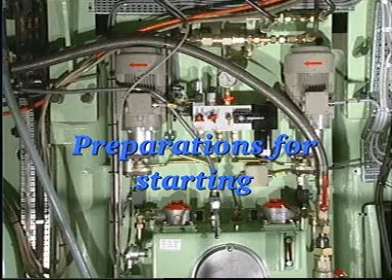Open the valve in the cylinder oil supply line. Switch on the electrical power supply. Start both oil supply pumps and check that they are able to run simultaneously.

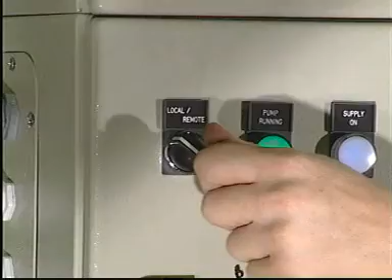Check that the pressure drop indicator for the pressure filter is green. Also check that the hands on the pressure drop gauges for both suction filters are in the green area. Check that the oil pressure is between 40 and 50 bar.

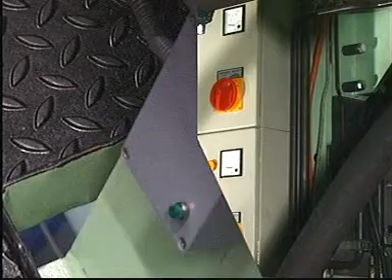Press the pre-lubrication button on the operating panel and check each of the feedback indicators to confirm that all lubricators are functioning properly. Set both pumps to remote control. The lubricating system is now ready for operation.

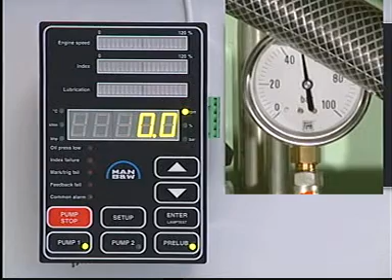When the auxiliary blowers are started up, the lubricating system will automatically start and carry out the pre-lubrication process. If the engine is not started up within a certain period of time, the lubricating system will return to the standby mode and then start automatically when the engine is started.

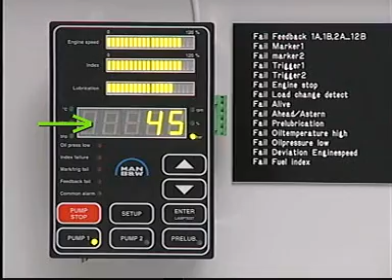Check that one of the pumps starts automatically when the engine starts and that no alarms have been activated. Check that the pressure builds up to 40 to 50 bar and check each of the feedback indicators to confirm that all lubricators are functioning properly.

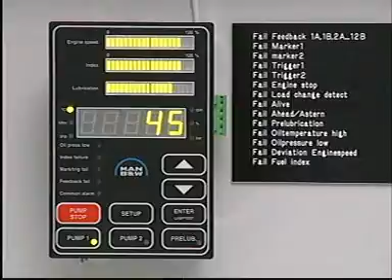Check that the oil temperature is between 40 and 60 degrees centigrade. Check that there are no leakages in the system. Check that the pressure is between 40 and 50 bar. Check each of the feedback indicators to confirm that all lubricators are functioning properly.

Feel the lubricating pipe for pressure surges, the presence of which indicate that the lubricating points are being supplied with oil. Make regular checks, for instance in connection with the scavenge port inspections, that each lubricating point is functioning correctly.

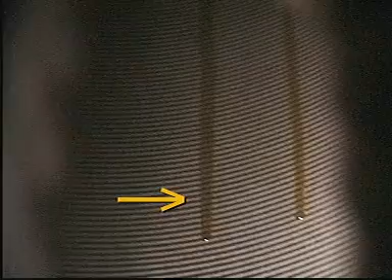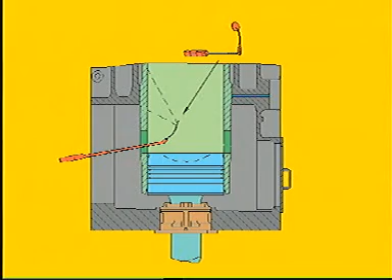Start the lubricating system and press the pre-lubrication button to inject oil into the engine cylinders. Use a mirror inserted through the scavenge port to check all lubricating points. Regularly measure the cylinder oil consumption via the cylinder oil tank and use these measurements to calculate the cylinder oil feed rate.

Once a good cylinder condition has been obtained, with well-running cylinder liners and piston rings, the good condition can in most cases be sustained by employing the basic setting to ensure the correct cylinder oil feed rate. The basic setting corresponds to the reading 100% on the operating panel.

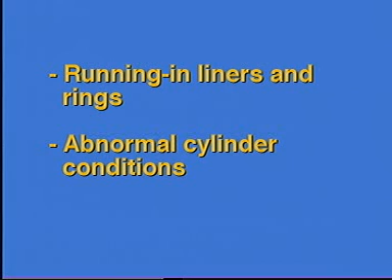When running in cylinder liners or piston rings, or in the event that abnormal cylinder conditions are detected during one of the regular scavenge port inspections, the feed rate of the relevant cylinders may have to be adjusted. See Instruction Book, Volume 1, Operation, Chapter 707. The feed rate of an individual cylinder can be adjusted via the operating panel.

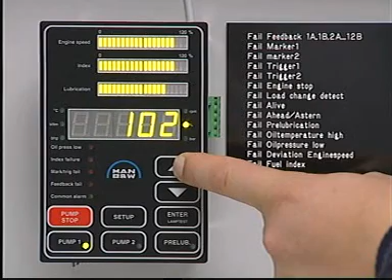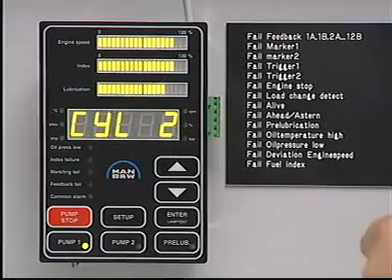Press Setup and Enter simultaneously to enter the setup mode. Press Setup to display the current feed rate setting. Press the up or down buttons to change the feed rate to the desired value. Press Enter to save the new value. Press Setup and then the up or down buttons to repeat this sequence for another cylinder, or press Enter to exit the setup mode.

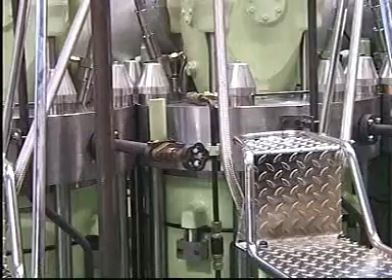Before starting any disassembling work, stop the engine. Shut off the starting air distributor. Block the main starting valve. Engage the turning gear. Open the indicator cocks and switch off the electrical power supply to the pump station.

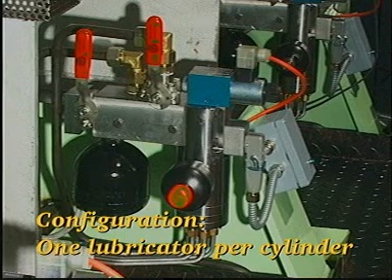Note, it is not necessary to stop the engine and pump station if the lubricator unit is fitted with 2 lubricators for each cylinder. See Instruction Book, Volume 2, Procedure 903. In the event that a lubricator malfunction activates the engine slowdown function, the lubricator can be replaced without stopping the engine, provided that lubrication is re-established within a maximum of 15 minutes.

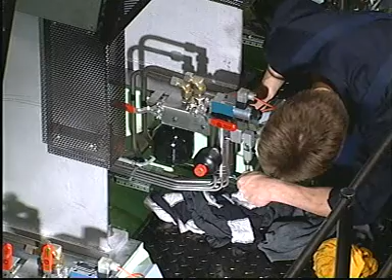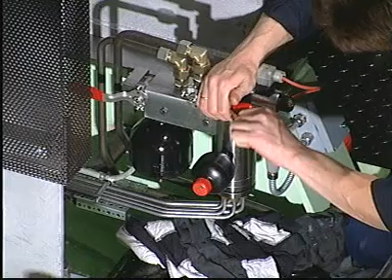Close the supply valve and then open the equalizing valve by turning both handles to a horizontal position. Loosen and remove the screws from the cover with lubricating pipes. Remove the screws that secure the lubricator to the hydraulic block. Disconnect the electrical plug and remove the lubricator.

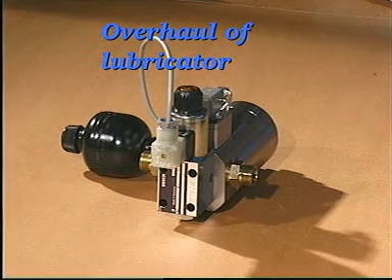Secure the lubricator in a bench vise with soft jaws. Unscrew the oil accumulator and the adjusting screw, and remove the bushing. Discard the O-ring from the adjusting screw.

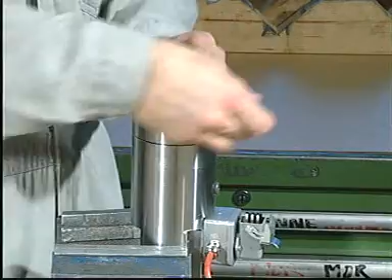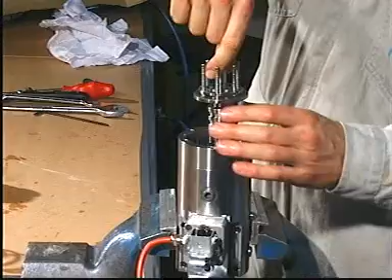Remove the screws that secure the cylinder block to the housing and remove the cylinder block. Discard the O-ring from the cylinder block. Remove the spring and the actuator piston and remove the plungers.

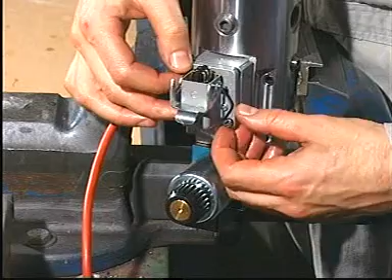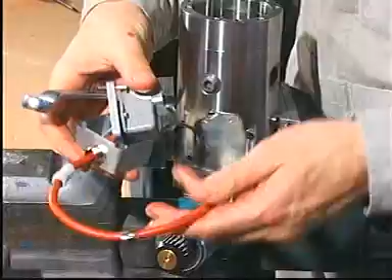Loosen and remove the connector on the solenoid valve and remove the terminal box. Carefully unscrew the feedback sensor. If the feedback sensor is to be replaced, disassemble the connector and disconnect the feedback sensor.

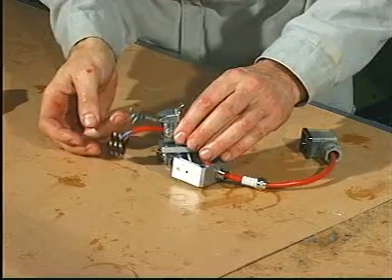Mount the new feedback sensor after fitting it with a new O-ring. Connect the wires as shown in the instruction book and then reassemble the connector.

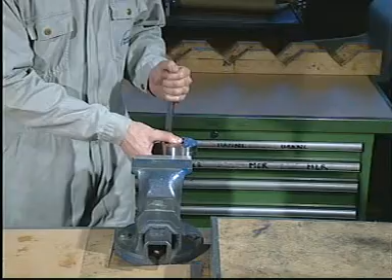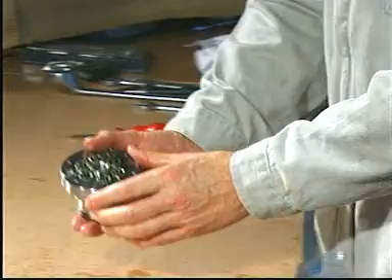Place the cylinder block in a bench vise with soft jaws and remove the non-return valve cover. Remove the springs and the steel balls. Remove and discard the O-rings. Carefully clean all the parts and dry them with clean, non-fluffy rags.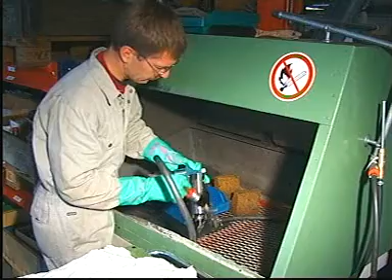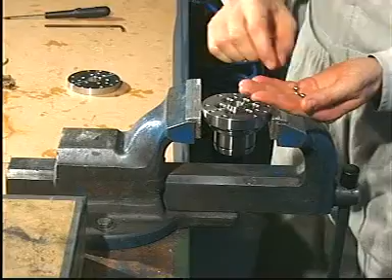Inspect all seats and sealing surfaces with a magnifying glass. Use a lamp to inspect the internal surfaces. Using new O-rings, reassemble the cylinder block. Insert the screws so that they just engage in their threads.

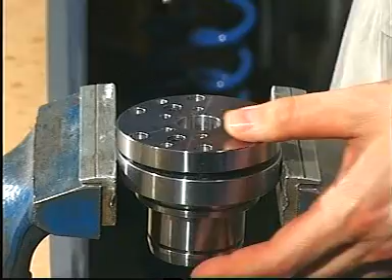Check with the tip of a small screwdriver that the springs of the non-return valves are correctly centered. Fully tighten the screws. Mount the plungers in the actuator piston and lubricate the plungers and cylinder block with cylinder oil.

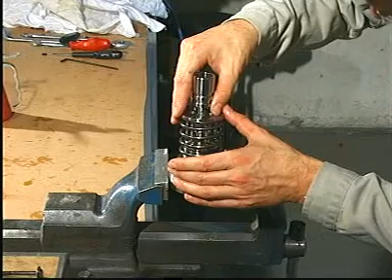Insert and align the plungers in the cylinder block. Remove the actuator piston assembly, mount the spring and reinsert the assembly. Check that the plungers can move freely. Press the actuator piston downwards and insert the screw to keep the parts together.

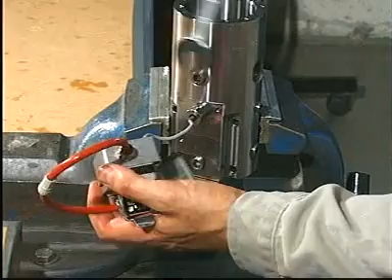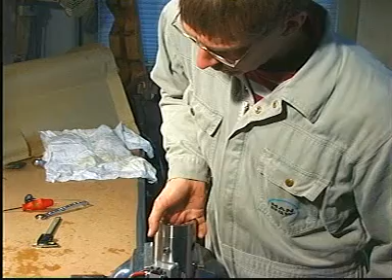Place the lubricator housing in a soft-jawed vise and mount the feedback sensor provided with a new O-ring. Check that the end of the sensor does not protrude into the cylinder for the actuator piston. Use fingers and something with a firm, straight edge, for example a caliper, to carry out this check. Mount the terminal box and the solenoid valve connector.

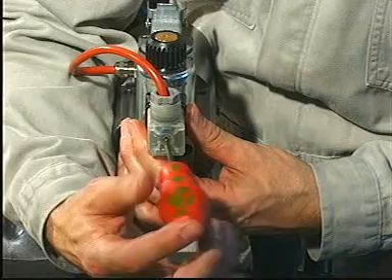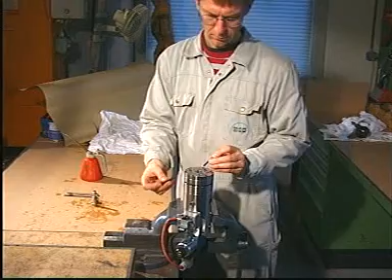Lubricate the housing and mount the cylinder block assembly. Remove the screw from the cylinder block assembly. Mount a new O-ring on the adjusting screw and mount the bushing and adjusting screw.

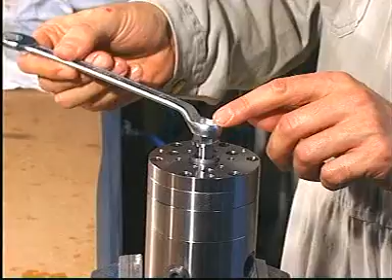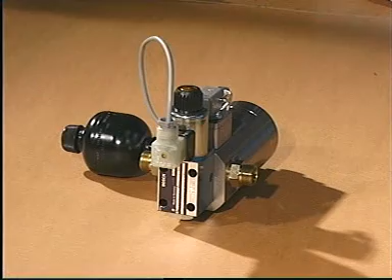Check the condition of the gasket before mounting the accumulator. Finally, mount the oil accumulator. If the lubricator is not to be installed immediately, use plastic plugs to protect each opening and coat all surfaces with a thin layer of oil. Mount new O-rings on the hydraulic block and on the cover with lubricating pipes.

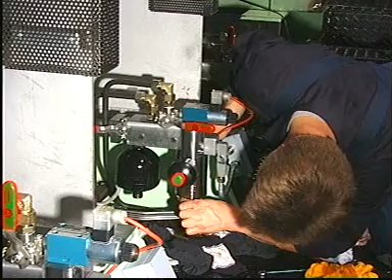Carefully mount the lubricator and secure it to the hydraulic block with the 4 screws. Connect the electrical plug and mount the screws which secure the cover with lubricating pipes to the lubricator. Finally, close the equalizing valve and then open the supply valve by returning both handles to the vertical position.

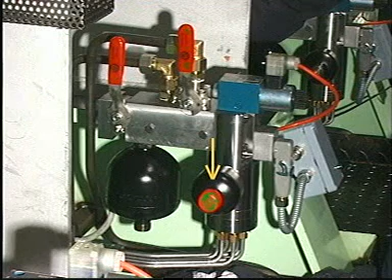The smaller outlet accumulator must be dismounted before the pressure test is carried out. If there is room, the larger inlet accumulator can be tested while mounted. Note: it is not necessary to stop the engine and pump station to check the inlet accumulator if the accumulator is equipped with a cut-off valve and a Minimess drain connection. See Instruction Book Volume 2, Procedure 903.

Close the supply valve and then open the equalizing valve by turning both handles to a horizontal position. Loosen the oil accumulators and unscrew them slowly to release any remaining oil pressure.

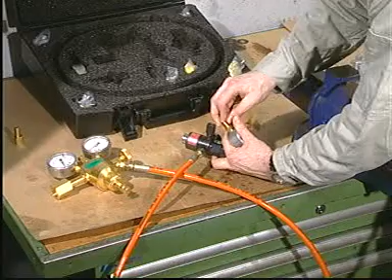Connect the hose to the reducing valve and to the filling valve. Insert a copper gasket and mount the 0 to 60 bar pressure gauge. Connect the reducing valve to the nitrogen cylinder and tighten all connections.

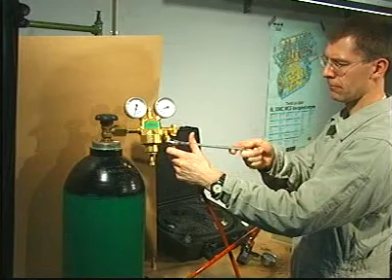Secure the inlet accumulator in a bench vise with soft jaws and remove the plastic plug. Carefully clean the sealing surfaces of the accumulator and the filling valve and mount the filling valve.

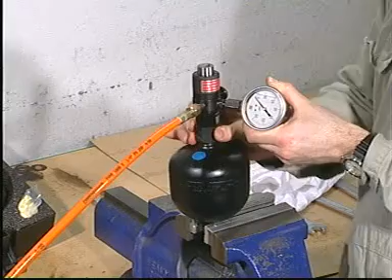Make sure that both the venting valve and the outlet valve are closed, and then open the plug screw in the accumulator with a 1/2-inch square socket wrench. Read the nitrogen pressure and compare it to the value stated in Procedure 903. If the pressure is too high, reduce the pressure by opening the venting valve.

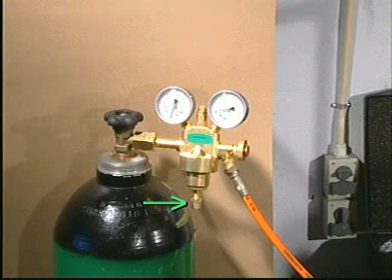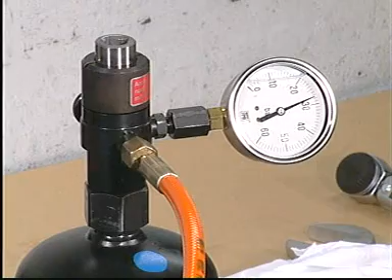If the pressure is too low, make sure that the reducing valve spindle is turned fully counterclockwise and then open the valve on the nitrogen cylinder. Turn the spindle slowly in the clockwise direction until the outlet pressure is slightly above the specified pressure. Open the outlet valve, fill the accumulator to the specified pressure, and then close the outlet valve.

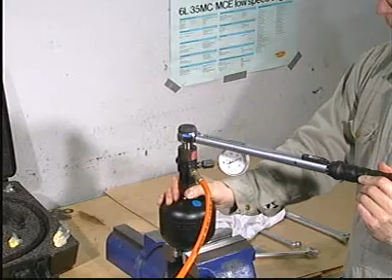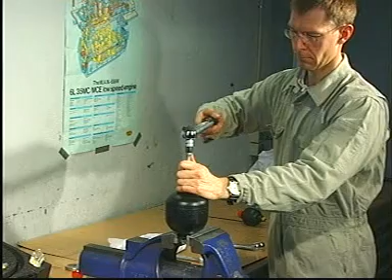Adjust the torque spanner to the value stated in Procedure 903 and tighten the plug screw. Open the venting valve, close the valve on the nitrogen cylinder, then open the outlet valve and turn the spindle fully counterclockwise. Remove the filling valve and once again tighten the plug screw to the specified torque. Finally, mount the plastic plug.

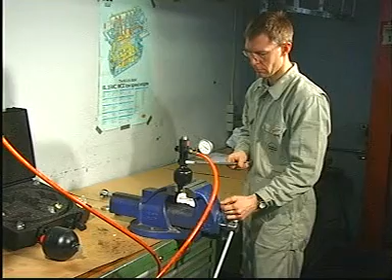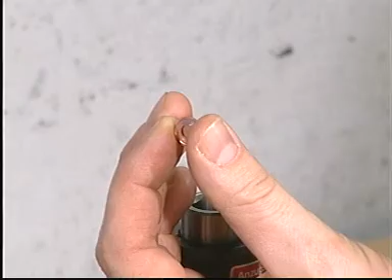Secure the outlet accumulator in a soft-jawed vise and remove the plastic plug. Carefully clean the sealing surfaces of the accumulator and the filling valve and mount the filling valve. Remove the 0 to 60 bar pressure gauge. Fit a copper gasket and mount the 0 to 10 bar pressure gauge. Repeat the pressure testing procedure. Refer to Procedure 903 for the specified nitrogen pressure.

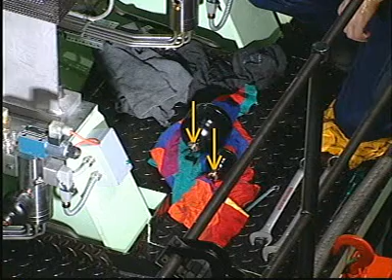Check the condition of the gaskets before mounting the accumulators. Mount the accumulators. Finally, close the equalizing valve and then open the supply valve by returning both handles to the vertical position.

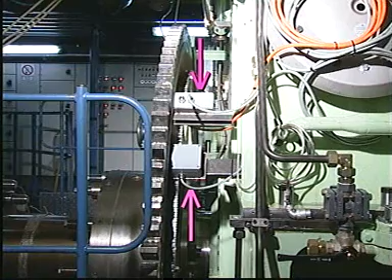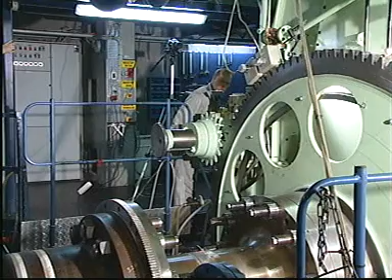The position of the crankshaft has no relevance with regard to the checking and replacing of the trigger pickups. However, before checking and replacing marker pickups, the crank throw for cylinder number 1 must be turned to the top dead center position. Check the top dead center position at the turning wheel and confirm it by means of a pin gauge measurement in the crankcase.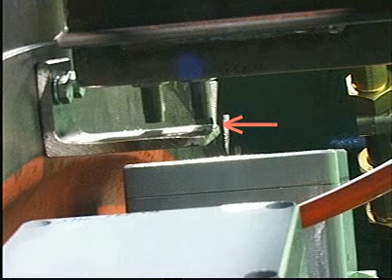Check that the uppermost edge of the marker plate is in the center line of the marker pickups. Check the distance between the pickups and their counterparts with a feeler gauge. See Instruction Book Volume 2, Procedure 905. Adjust if necessary. Remove the junction box cover.

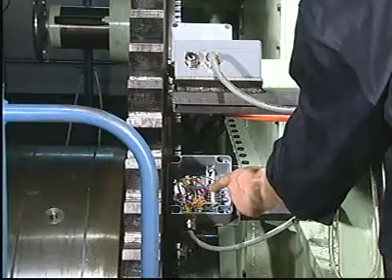Before replacing the pickups, make a sketch of the wiring connections, indicating which wire is connected to which positions, so that the safe remounting of the pickups can be ensured. Loosen the nuts, lock nuts and wires, and replace the pickups.

After installing the new pickups, check that the uppermost edge of the marker plate is in the center line of the pickups, and check that the gaps to their counterparts correspond to the values given in the instruction books. Finally, reinstall the junction box cover.

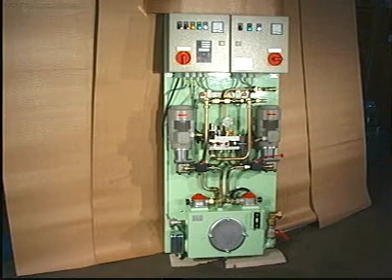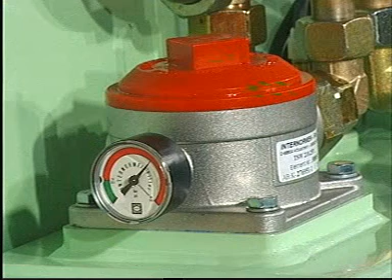If the hand of the pressure drop gauge points to the red area, the suction filter must be overhauled. This can be carried out while the pump station is running. Stop the pertaining supply pump and switch off the electrical power supply. Close the valve in the suction line and dismount the suction filter cover. The suction filter housing has a built-in cut-off valve which automatically stops the oil flow to the housing during disassembly. Remove the filter insert and fit a new one.

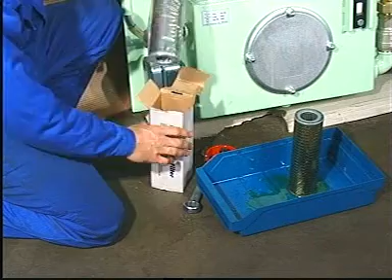Mount the cover. Open the valve in the suction line. Finally, switch on the electrical power supply and set the pump to remote control. Check that there are no leakages.

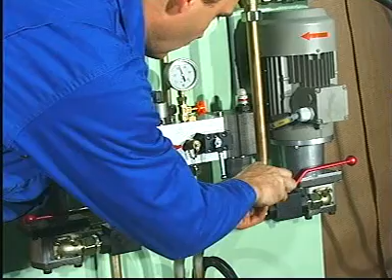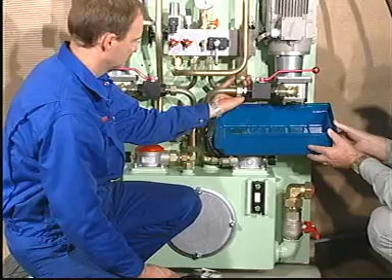If the pressure drop indicator is red, the pressure filter must be overhauled. This can be carried out while the pump station is running. Turn the handle of the valve so that the oil bypasses the filter. Dismount the filter housing and replace the filter insert with a new one. Mount a new sealing ring on the filter housing and mount the housing.

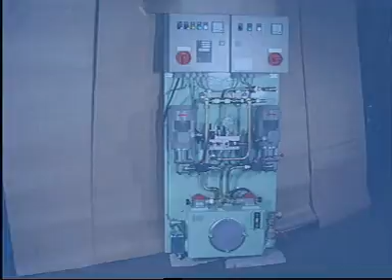Reset the pressure drop indicator, if this has not already been done automatically, and turn the handle of the valve so that the oil passes through the filter. Check that there are no leakages. Read the oil pressure on the pressure gauge and compare the reading with the value given in the instruction manual. If necessary, adjust the pressure by turning the handle on the side of the hydraulic block.

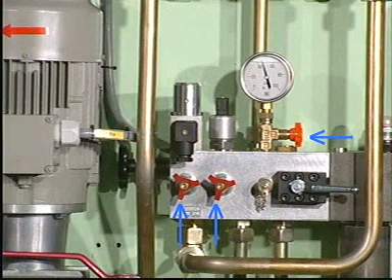The hydraulic block is fitted with a number of cut-off valves, which allow the pertaining components to be replaced while the pump station is running.